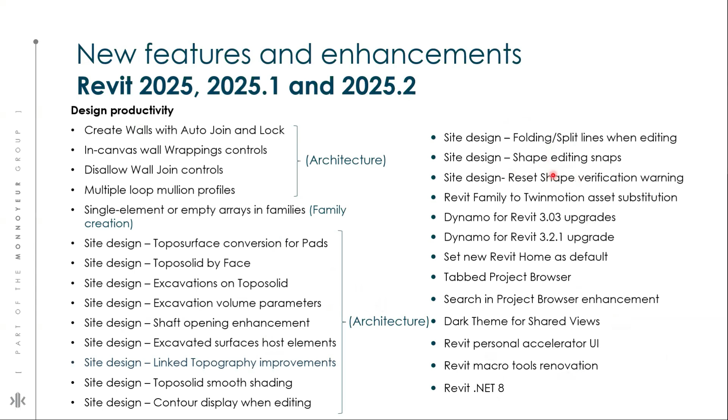So the core feature here is basically the list of core feature enhancements that have been updated through the 2025 to 2025.2 releases. You will see most of them are related to architecture, some are iterative improvements, some are in sustainability, some in structure, and a few in the MEP sectors. So we will explore each one of them one by one.

Okay, so let's just start with the design productivity. You will see we have some new features regarding architecture changes.

The next is create walls with auto join and lock. Previously we don't have this auto join and lock option. Now you can automatically join, or join and lock, a newly created architectural wall with the adjacent one. If you insert any element like a door or window, it will automatically create an opening for you, and you can still use wrapping around your inserted items. I will show you some demonstrations at the end of this session if we have time.

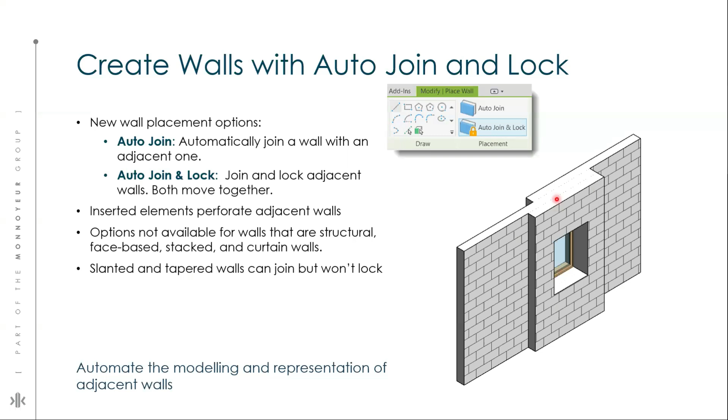So these options are not available for your structural walls, face-based, stacked, and curtain walls. But if you join two walls together like this and align and lock them together, you can simply move them together as well.

Another new option: in your Revit view, you will see these icons in your canvas which can control your wall wrapping. You can quickly control wall wrapping just by clicking on these icons. They are view specific, just like annotation stuff, and wrapping must be enabled in your wall type properties window for these icons to be available.

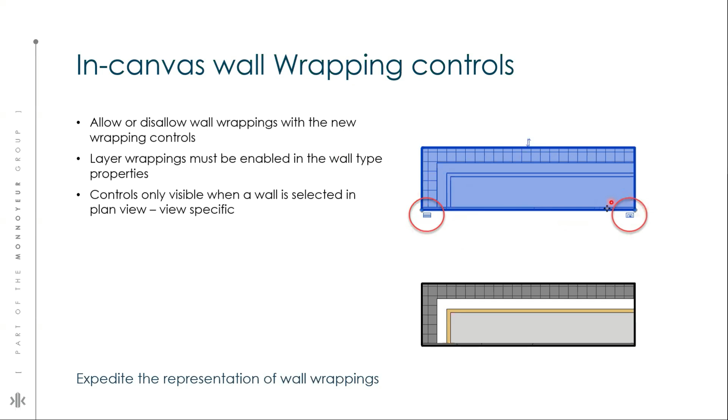Same goes for disallow wall join. This function was previously in the 2024 version as well, but now you can control it directly in your canvas. You can simply see this icon and click or unclick to allow or disallow your wall joints. It will work in your plan views and your 3D views as well.

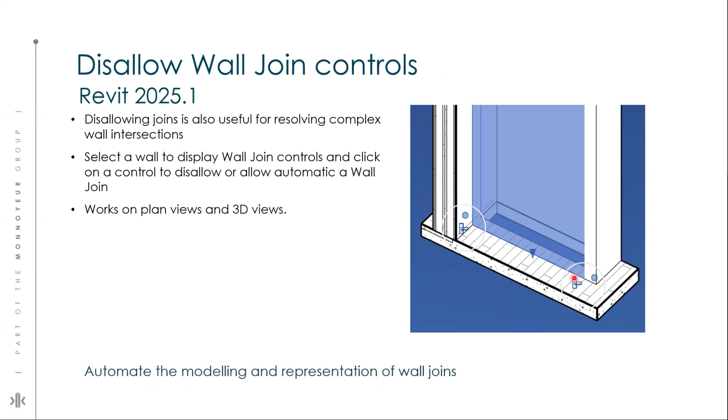Another great improvement is you can now create profiles for your mullions, and in your profile, you can use multiple loops. Just like if you work with families, you must have the idea of the loop - you can create multiple loops. This particular profile is created using multiple loops. You can see this is a single loop here, and another loop here. So you can now use multiple loops to create your mullions with profiles, giving you a higher level of development in your mullions as well.

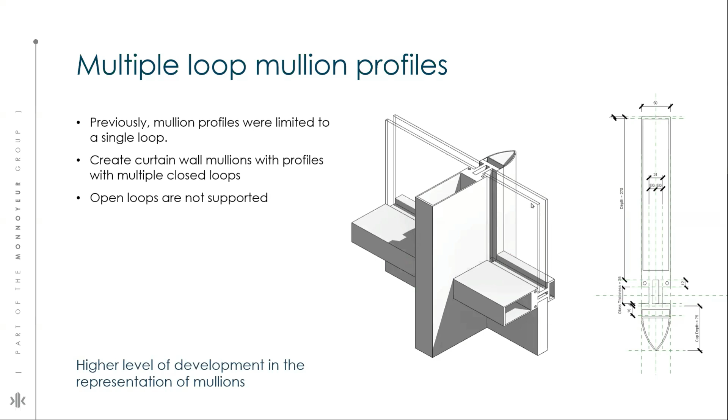If you do families stuff, in the previous version we had a limitation on the number of array counts - we couldn't go lower than 2. But right now you can create a family with an array count of 0 and 1 as well, and this is a pretty useful tool. If you want to create a seating arrangement for an auditorium or even for a dining table, you can create your single family and just define your array count. So in the 2025 version, your array can simply contain 0 or 1 element as well.

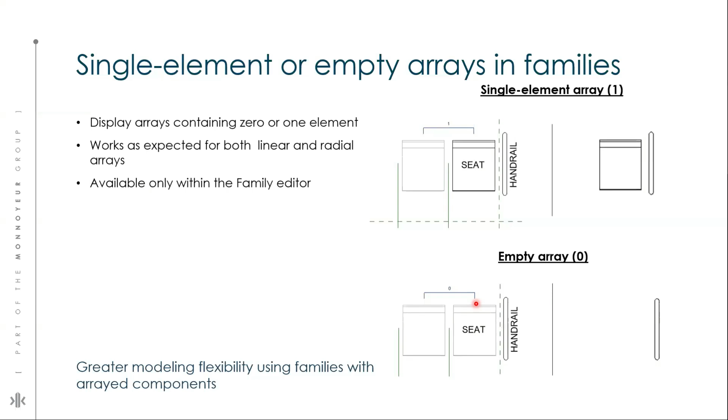There are also some major improvements in topo solids. If you remember, in the 2023 version we had building pads, and in the 2024 version they removed the building pads option. But if you're now importing your 2023 model into the 2025 version, you can still create your topo solids, and these building pads will convert into the excavated area. So the new option added to your topo solid in 2025 is the excavation area, where you can simply excavate the area from the topo solid.

Another great option is that previously you were not able to use massing to create your topo solid. Now you can use massing to create the topo solid, but you just need to make sure it's on any non-vertical faces. If you select your topo solid which is created from the mass, you'll always see this option in your properties palette ticked, showing that this topo solid is actually created from the masses. And if you're using masses, you can quickly create some complex shapes as well, and further use Dynamo and all of this stuff.

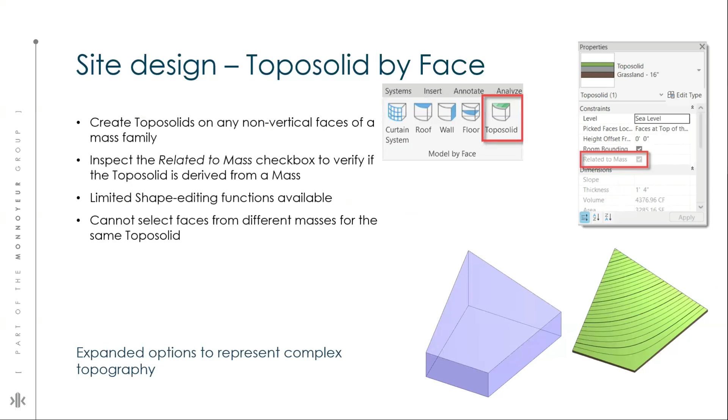So the new improvement in your TopoSolid is you can excavate your TopoSolid area by using a floor, roof, and another TopoSolid as well, which is really a good improvement. Previously you just needed to create an in-place family or in-place void to cut or excavate your TopoSolid area, and now you can immediately get back to the original shape by clicking on removing excavation. This way you don't lose your topo solid or data history, and you have more control over your topography cutouts.

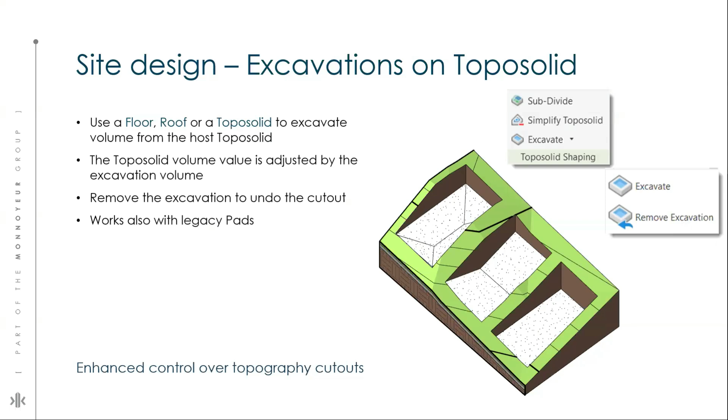With this excavation, you'll see some new parameters added. There are two parameters added for the topo solid: total excavation volume and individual excavation volume. Let's say you've created multiple excavations using the floor, wall, and other items - you'll see the excavation volumes here, like with the floor, with the basic wall and wall foundation for different types, and your total excavation volume as well. They can also appear on your schedule - you can use multi-category schedules to see the excavation volume, which makes it easier to coordinate with the site personnel, and it's a more efficient way to populate your excavation volume.

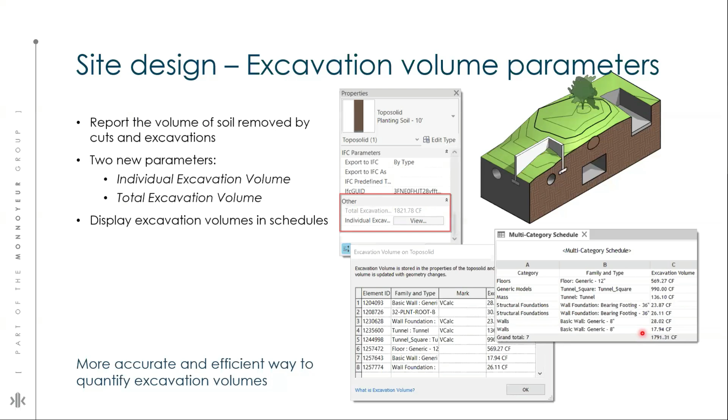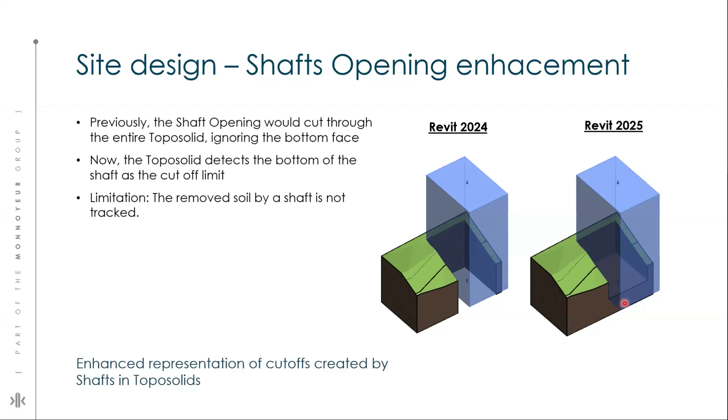Another great feature: previously if your shaft opening was touching your topo solid, it would cut through the whole depth of your topo solid. But now in 2025, it responds to the top and base constraint of your shaft. You can see in this picture the base constraint here, and the cutout in the topo solid - so it's now responding to the base constraint of your shaft cutout. This is a great enhancement in cutting out your topo solid as well.

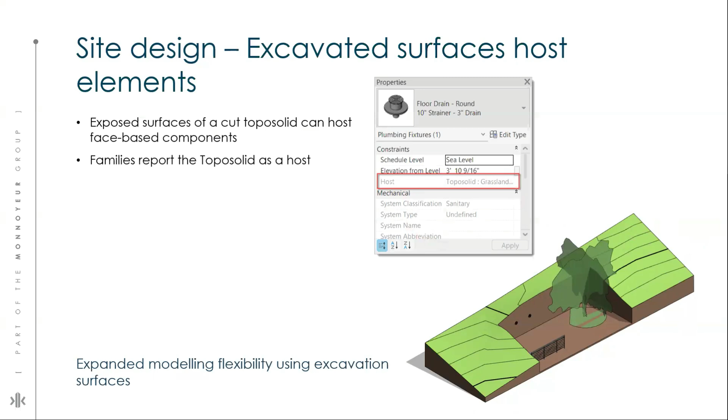This one is another great one. Previously, when you cut your toposolid or used anything like a shaft to cut your toposolid, you were not able to host anything on your cutout area. You were able to place railings over your toposolid, but not hosted elements. Now you can host your elements on these cutout areas, and you will notice that your host will be your whole toposolid. That's a pretty great enhancement in the 2025 version.

Next, if you have link topography, you will see that elements like site components, trees, parking lots, and even spot annotations placed on the link topo will be preserved after reloading the revised link. You don't need to do extra work if you reload or change anything in your link model. This is again a great improvement.

But if you are working with link topography, note that if you reload the link and the shape or face of your topo has changed and it does not include the original host surface, the elements won't be hosted at the original plane. So you need to take care of this as well.

This is for visuals, like you can see the triangulated areas here. If you have a lot of triangulated area, the new option is added under Massing and Site. You just need to click on this expanded panel, and you will see this topo solid smooth shading. This is the example of topo solid smooth shading—you can get rid of these triangulated sharp corners.

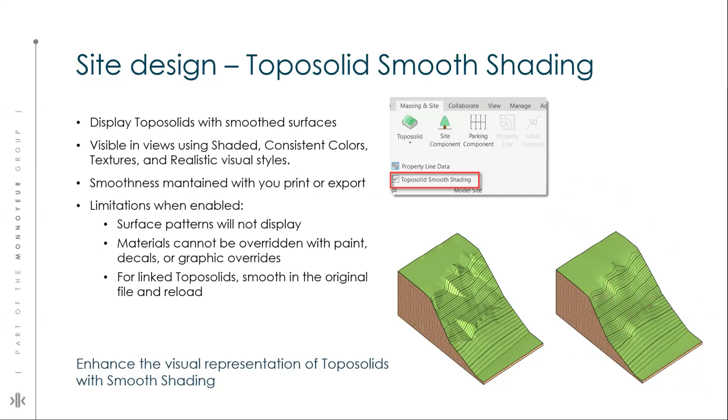Now, if you have used 2023 or 2022 versions for editing your topography, you will see that this is the most hectic process when placing the topo solid points. The improvement now is that when you are in editing mode, you will still be able to see your contour. This basically gives you improved control over editing your points, so you can still see the contour display while placing points on your topo solids.

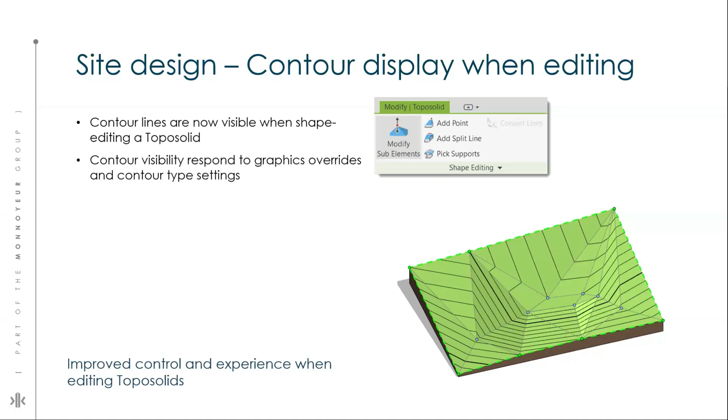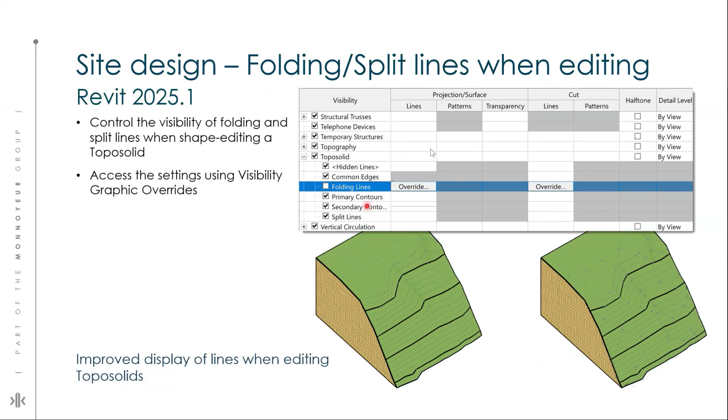Some more controls in the visibility graphics—if you go on topo solids here, you can see the folding lines, which are these triangulated ones. You can turn them on and turn them off during the editing process.

This is the most liked feature. They have given you the option to snap to the points in your topo solid. You can simply enable or disable the snapping to internal points and edges when you are in your shape editing mode, making it easier to pick up any particular point.

Let's say you have created a floor in your topo solid. When you are in editing mode, you can simply click on snap XYZ and you will be able to pick the points on your floor, or even on your roof or any other topo solid. This is a great feature, as it increases the accuracy of your points—if you have more points, obviously you have more accuracy. So this greatly increases the accuracy of creating your topo solid.

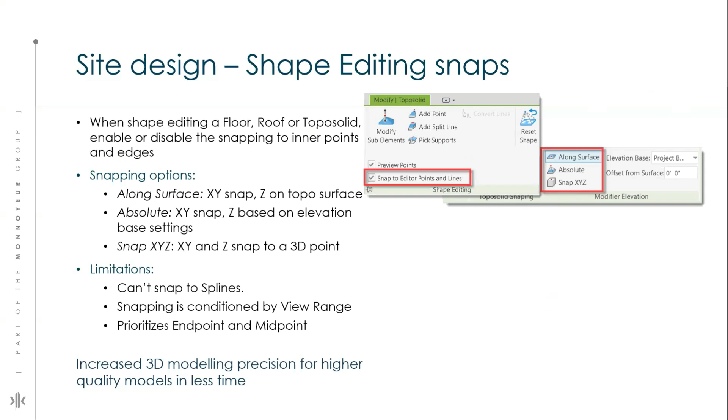And again, we have this option: if you have messed with your topo solid, you can always reset your shape and get back to your original shape of your topo solid. You have this reset shape button here, and you can simply go back.

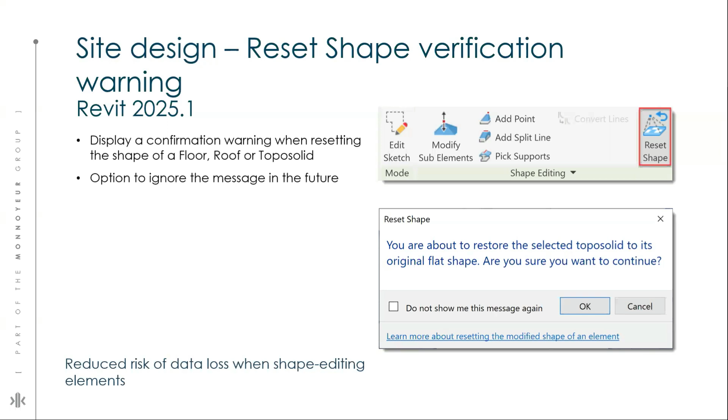Some improvements for Twinmotion—you are now able to link your low detail Revit families to high resolution Twinmotion assets. This lets you efficiently control the placement of elements within your Revit environment without sacrificing computing performance. You just need to go to this substitution setting, quickly set up your substitution directly, and map your Revit family with the Twinmotion object, and it won't use your computation power. This is a good feature for those interested in creating renderings.

And we have some upgrades in Dynamo as well—a few more nodes are added, like topo-solid nodes. You can simply create topo-solids by using the Dynamo nodes. Some more updated sample files are added as well, along with improved interactions with geometry. So it's nearly an improved version of Dynamo, letting you work better with the 3.03 upgrade of Revit 2025.

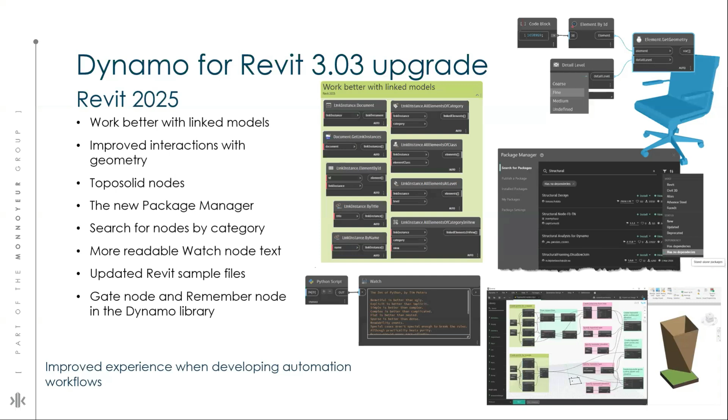And some UI updates as well. You will see new homepage, new workspace, workspace-based templates, some new nodes, and you can create panels on curved surfaces, and DefineData node for validating incoming data type. You can unpin and collapse preview bubbles, and you can update node icons and library, or simply customize the node icons and the library. So overall, UI improvement as well.

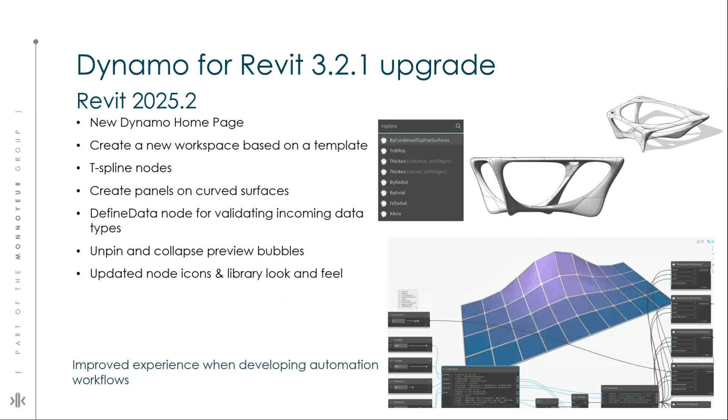You might have seen this before in the 2024 version, but in the 2025 version, this is basically the default view, and you can use it to search by name. You can search both the files and the folders in the same hub, and you can simply switch back to the legacy Revit home by toggling on or clicking here. You can switch back to the previous version's home as well, but in 2025, this is now the default UI of your home page.

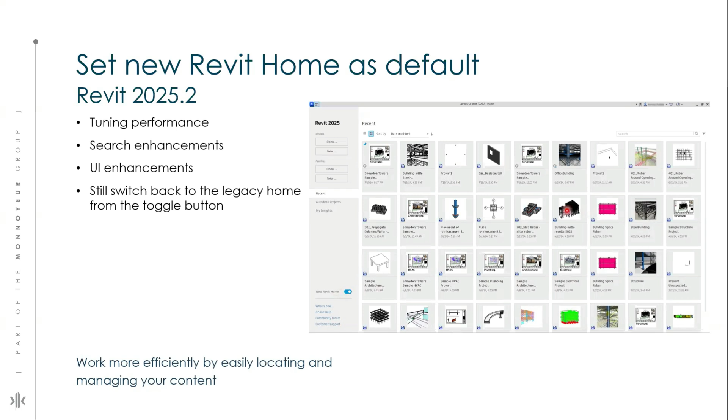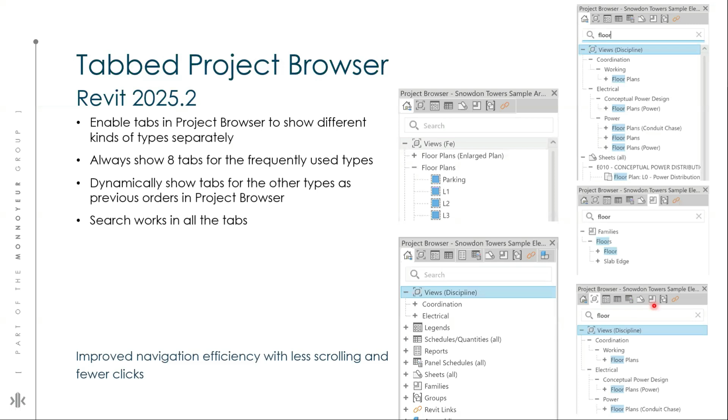Some improvement in your project browser, like this is useful if you have very large projects and a very large project browser. You will see some icons or tabs created separately for different things here, which is your views, legends, schedules, panel schedule, sheet families, group paneling. So you can quickly access different things in your project browser, and it basically minimizes your scrolling and number of clicks. So it improves your navigation with less scrolling and fewer clicks.

Again, search is improved in the 2025 version. When searching in the project browser, you can now view all the child nodes. So when the parent node, like this one, contains the keyword, the user could get a better search result than before. So when you cannot remember the accurate words in your child node, you can simply type the word and it will give you all of your child nodes under your parent node. You can see the difference here - there are 4 numbers here, and you can see 6 here, and 2 here. So again, the improvement means you can search more efficiently in the 2025 version.

For structure, those who work on the structure side, you will see the parametric splicing of the typical rebar. The new option is you can see the splice rebar here, and you have multiple rebars here. You can pick individual rebars as well, or you can simply splice them by length. You can define the minimum length and you can define the maximum length, and this way you can splice your rebars, basically enhancing your efficiency in accurately modeling your rebar systems.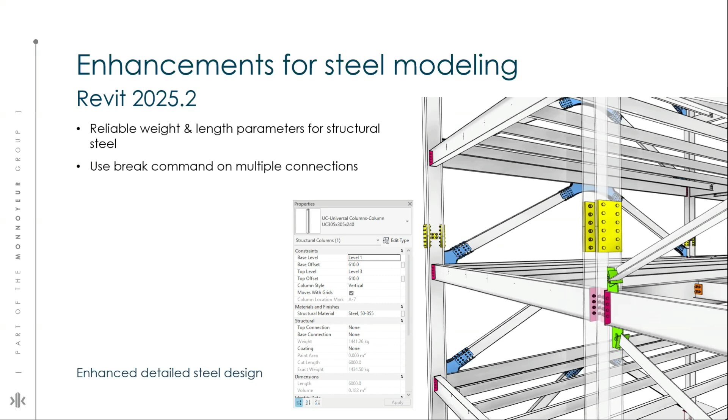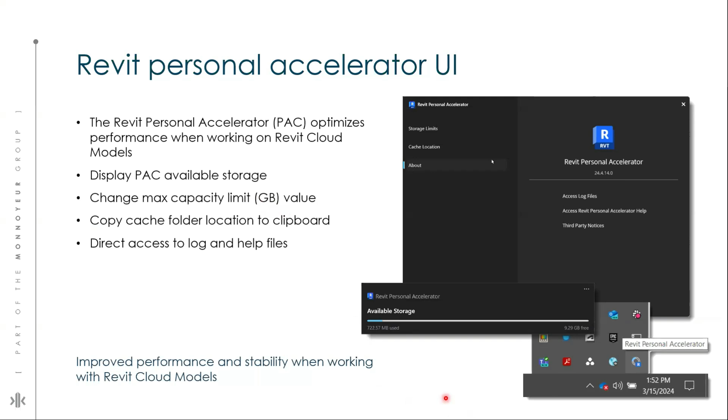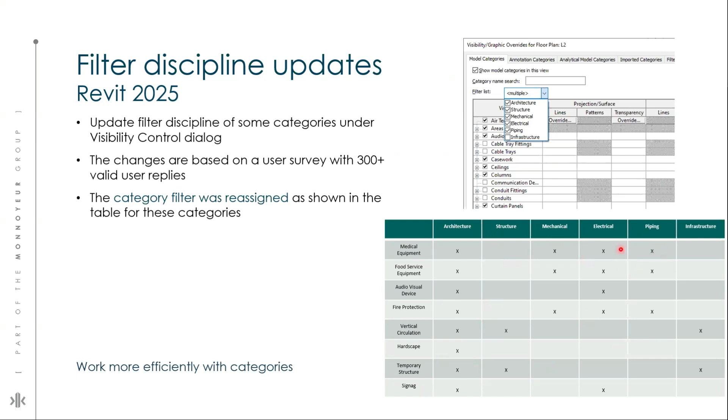Now for changes in visibility graphics - based on customer feedback, the discipline filter in the Visibility Graphics Override dialog has been updated, and you will see predefined list filters in visibility graphics. The modifications are shown in the table. For example, audio visual devices are now showing in both the architecture and electrical filters, and mechanical equipment as well. Same goes for medical equipment - you can see they are now showing in the architecture, mechanical, electrical, and piping discipline as well. So again, you can work more efficiently with this.

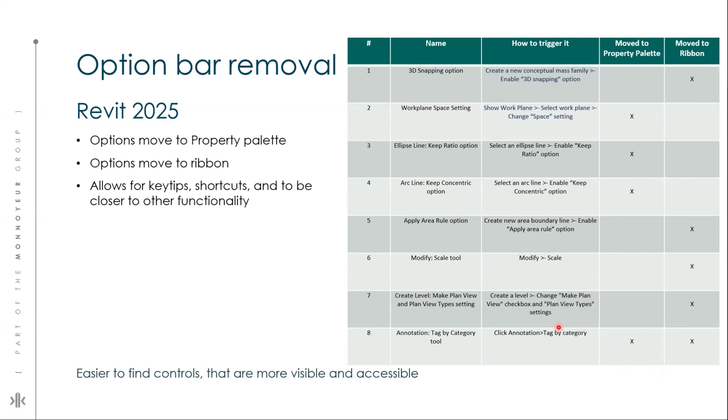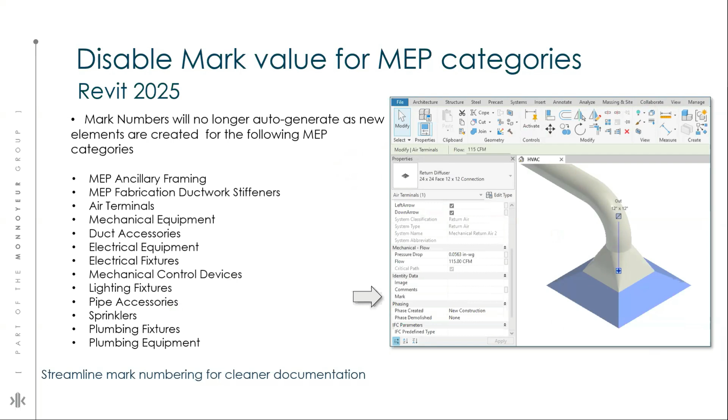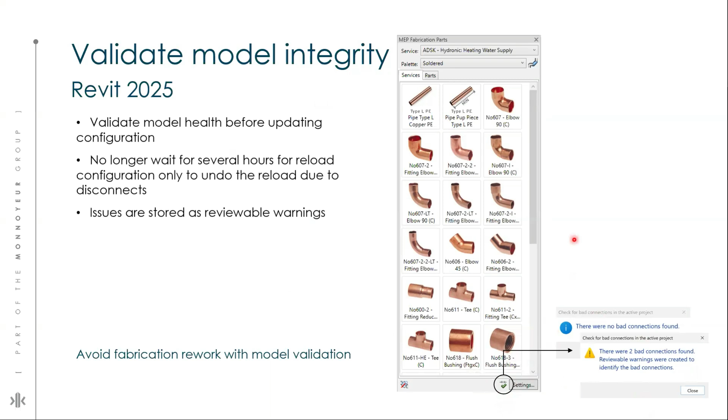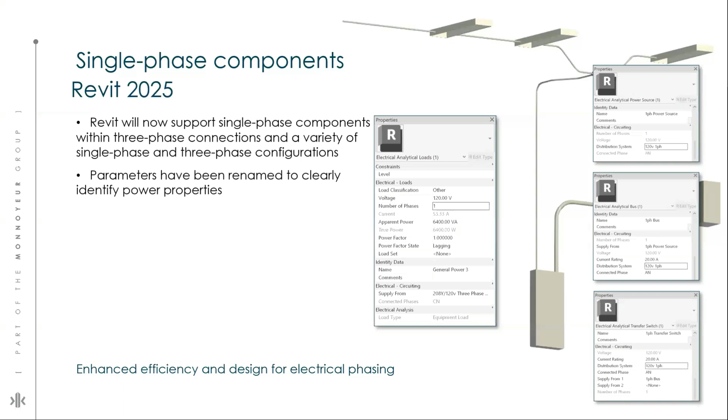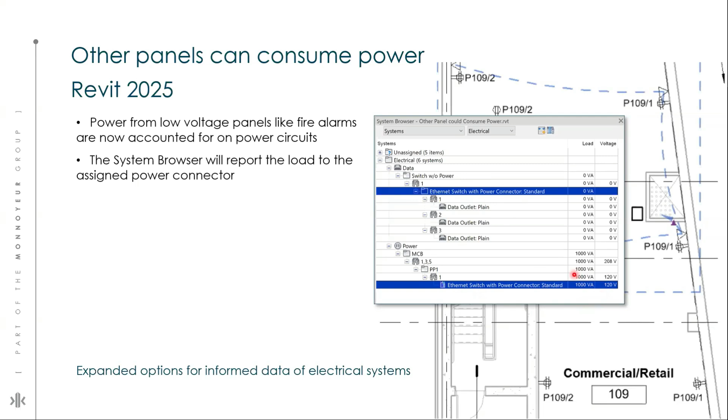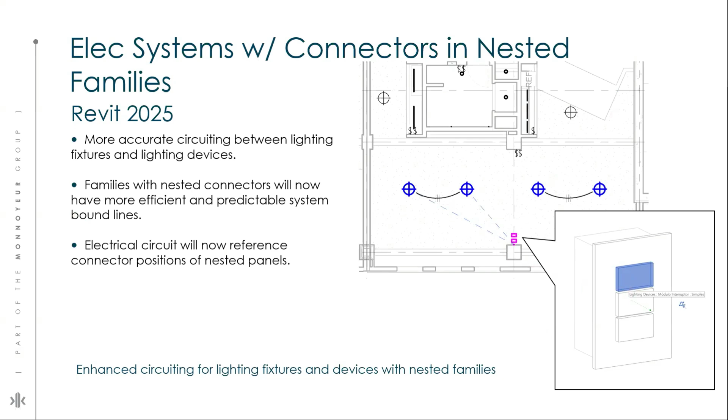You can add your fabrication data manager. You will now be able to add and remove types and edit data information in your parts editor, and even when you are editing your data, you can quickly see the preview of it. This makes your fabrication workflow a lot easier.

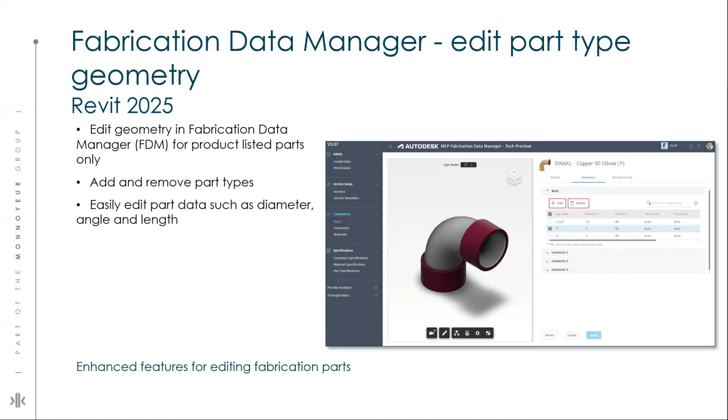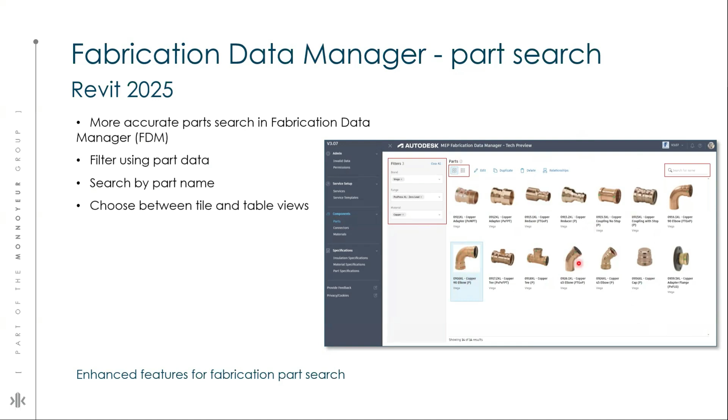Some enhanced searching capabilities - you can filter using the part data, search by part name, and redefine the thumbnail or preview of the UI of this window for a better experience.

With your fabrication data manager, you can simply assign images. You can generate images from your 3D model, or if you already have images, you can directly upload them here. You can upload PNG, JPEG, and JPG format images.

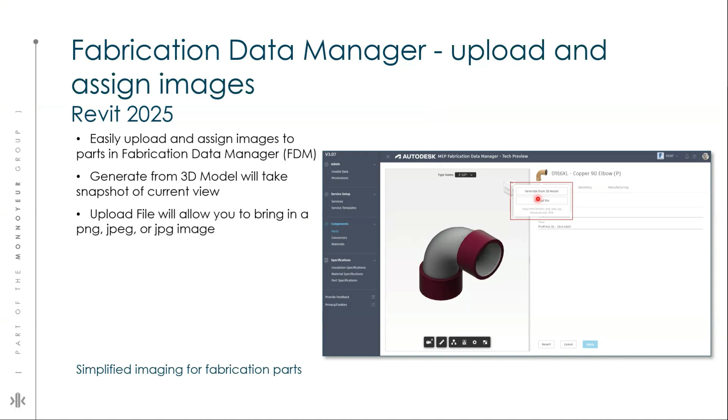The next step in the line is sustainability. You will see some more improvements in your GBXML and analysis tools. For those who have experience using this GBXML schema - GBXML is basically the XML schema from the green building standard, where you can simply transfer building energy data from different software to other software that supports GBXML. If you are doing load calculations, you can simply extract the data from your Revit model and export it to your load calculation software, and this will basically save you time from manually entering the room name and different engineering data.

Now it is more improved, and basically contains data for the zone equipment, air systems, water loops, hydronic loops, and some more HVAC systems, which includes air systems, heat exchangers, fans, chillers, and coil types. So now you are able to export more data with version 7.03.

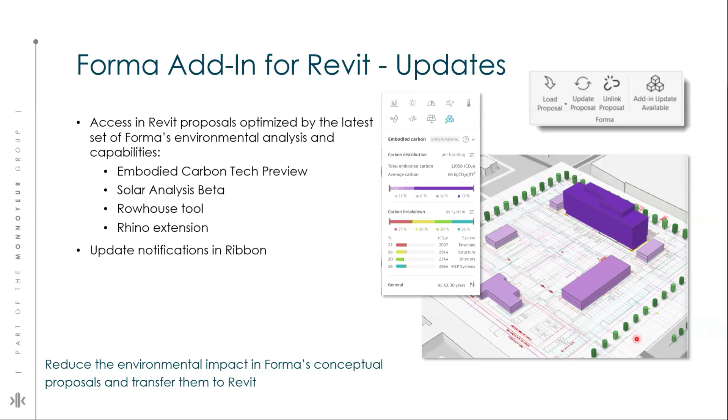For Insight, you will see it will be pre-installed in Revit 2025 version. So it will no longer be offered as a separate extension in future releases. You can use Insight or whatever you are building directly inside Revit, and you can send it for analysis on Insight as well.

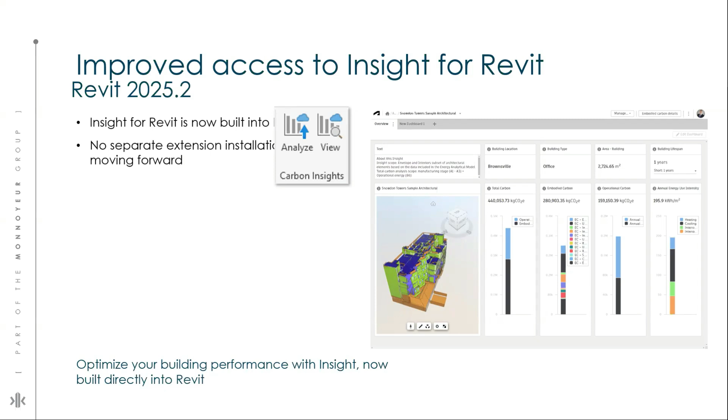We have this total carbon analysis for architects, and this next generation of Insight, or the introduction of carbon insight, helps you analyze the carbon impacts and more likely the trade-offs between the architectural system associated with a Revit model. Usually early phase design is recommended so you can quickly take more advantage of your insight.

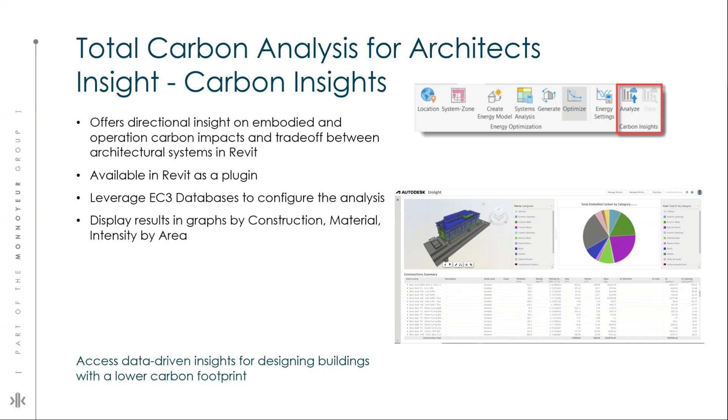Okay, so we will now talk about the analysis. You will see the major improvements in the structure ones and the major improvements in the MEP ones as well.

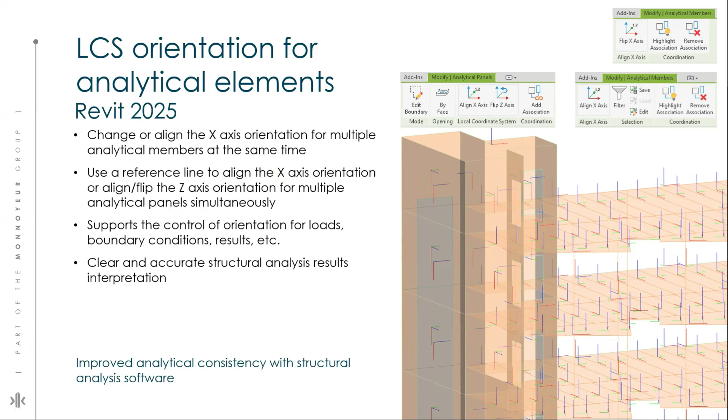In 2025, you can basically use the local coordinate system tool for these analytical members and panels to align axis orientation and direction. You can use a reference line again with some improvements in how you can simply align your members, and you can support the control of orientation for loads. Overall, it improves the analytical consistency with your structural analysis software, which is the Robot Structural package where you do the structure analysis.

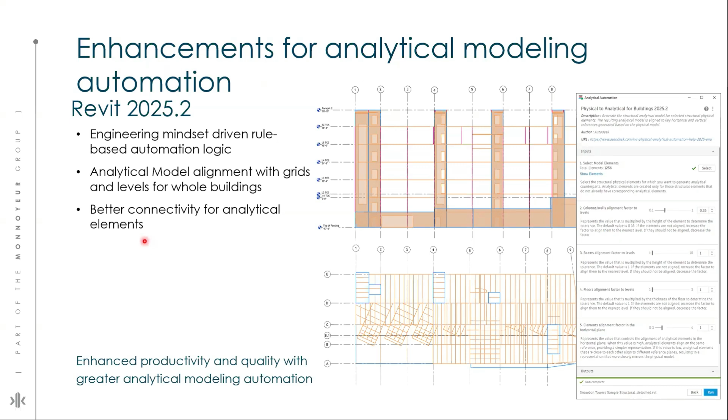You will see again some enhancement in analytical modeling. Those who have used this structure analysis or the analytical modeling tool will better relate to it. There's some more improvement with analytical automation and analytical model alignment with grids and levels for whole buildings, and you will see better connectivity for analytical elements as well.

Okay, so some interoperability improvements. Let's see.

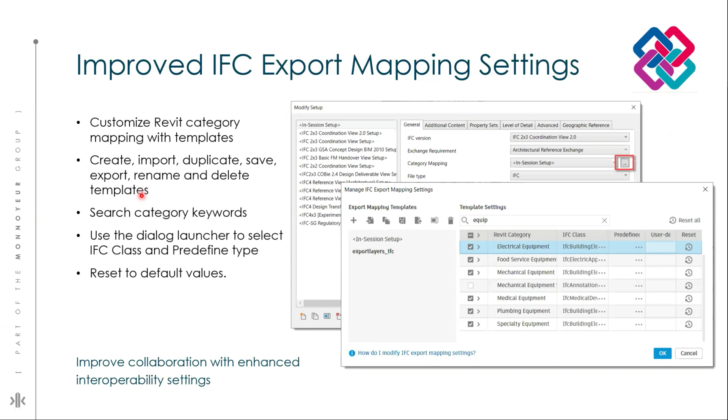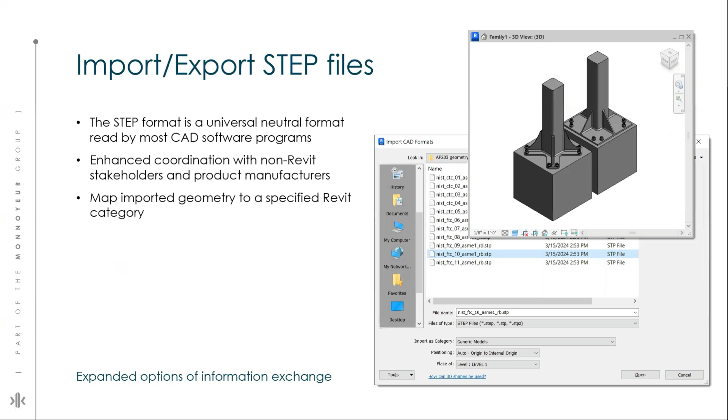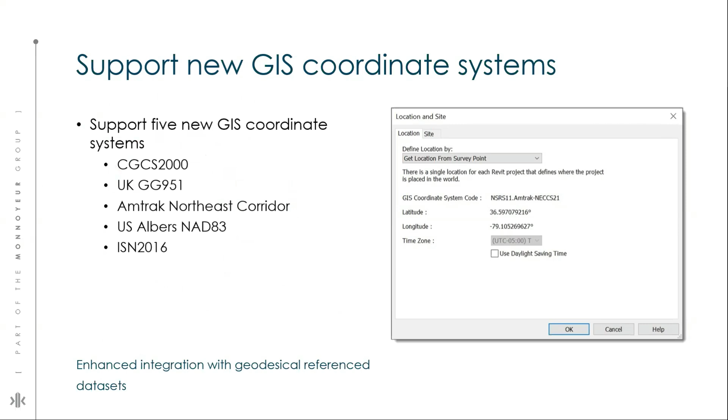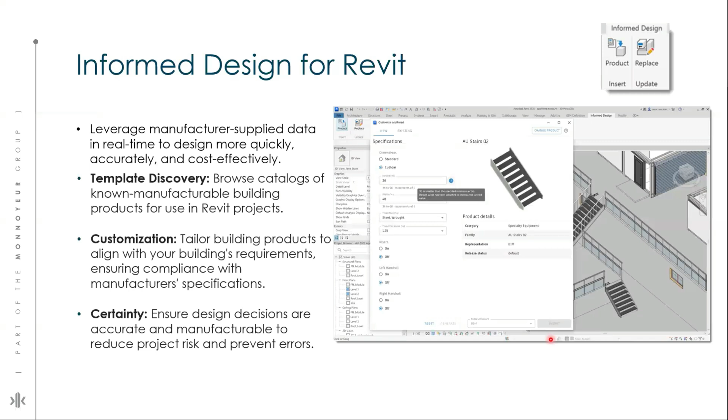Again, we have some new changes, update and replace, and I'm not going to spend more time on this.

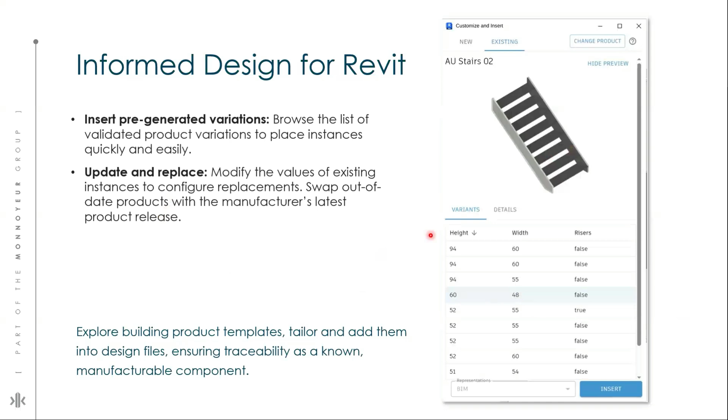For steel members, you can see this new detail steel design in Revit 2025. You can transfer and synchronize single part marks and assembly marks for your steel elements, and for structural steel connection components, from Advance Steel to Revit. This allows you to create GA drawings for your steel projects using Revit, giving you a better connected project across design, fabrication, and construction.

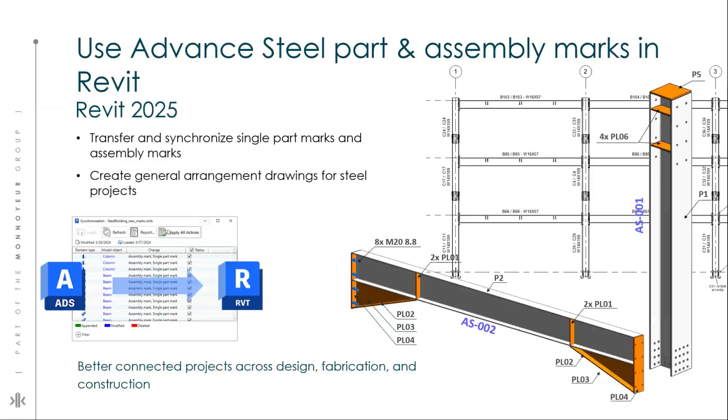Next, we will see some cloud improvements. You can easily see the monitoring and some changes in the monitoring of your coordination model, some UI changes, and you will see the display of the number of changes, added, modified, and deleted elements. They tried to make it more consistent, so you have a better collaboration experience.

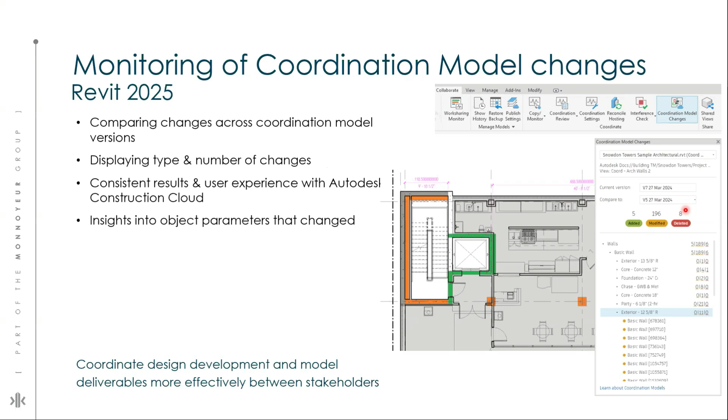Again, this is revised in the 2025.1 release, where IFC and the Navisworks file, the NWC file type, have been enabled for coordination model changes.

The NWC file exported from Revit will support reviewing coordination capabilities, as will files exported from AutoCAD. For IFC files exported from AutoCAD Architecture, MEP, or even Civil 3D 2018 and onwards, it supports ArchiCAD, Revit, MagiCAD, and Tekla Structures.

So the bottom line is it enhances linking of coordination models and better understanding of the objects that change in coordination models, highlighted and visualized in project views. You will have an enhanced linking experience with your coordination models.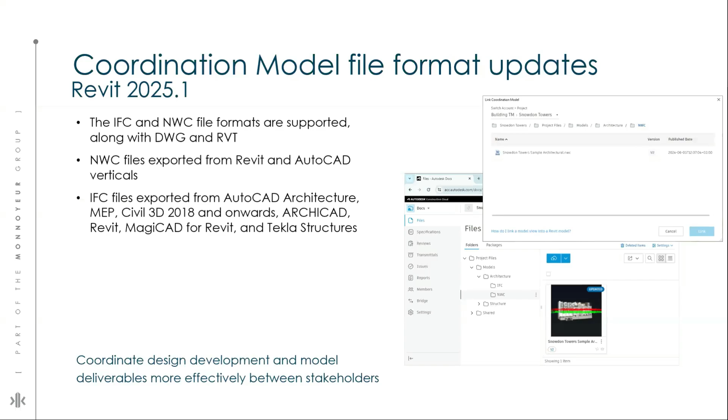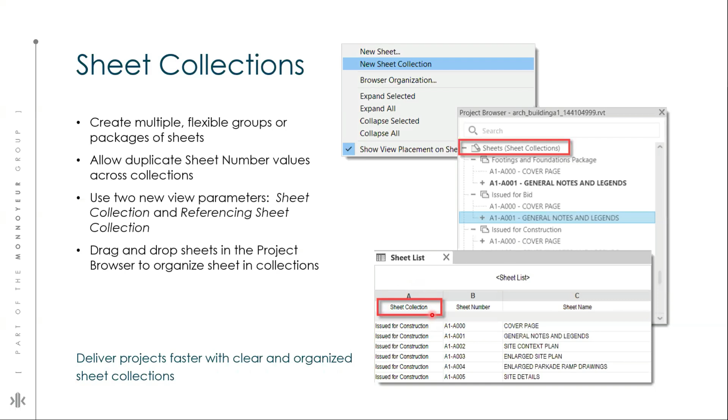Again, you can filter. In your sheet schedule, you will see this sheet collection parameter, and you can filter on the basis of it, giving you more control over organizing your sheets.

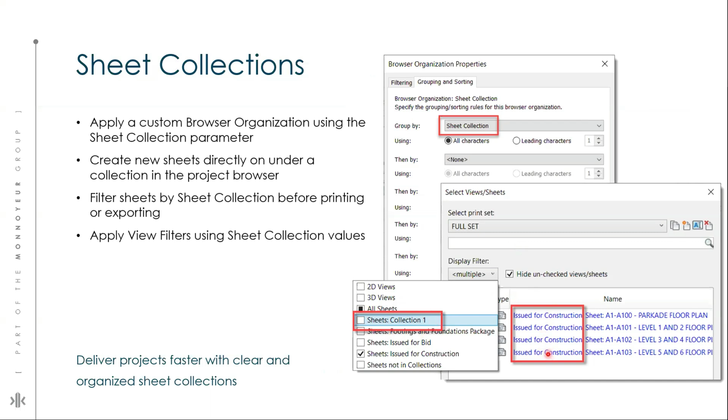Similarly, for your browser organization, if you want to organize your browser hierarchy for the sheets, you can use the sheet collections as well. And even for printing, you can use the sheet collection. If you want to print the sheets grouped under collection one, you can print them as well.

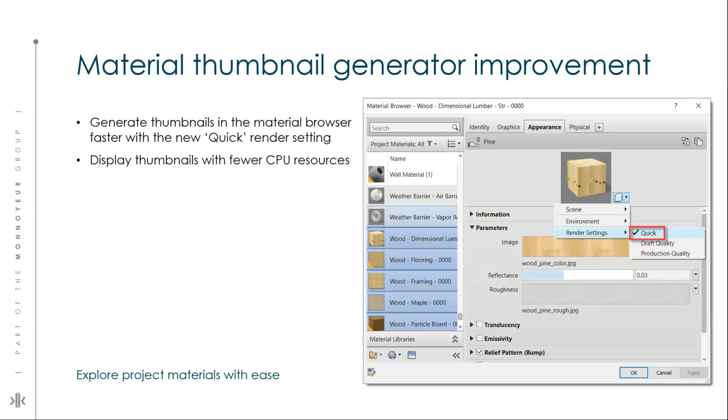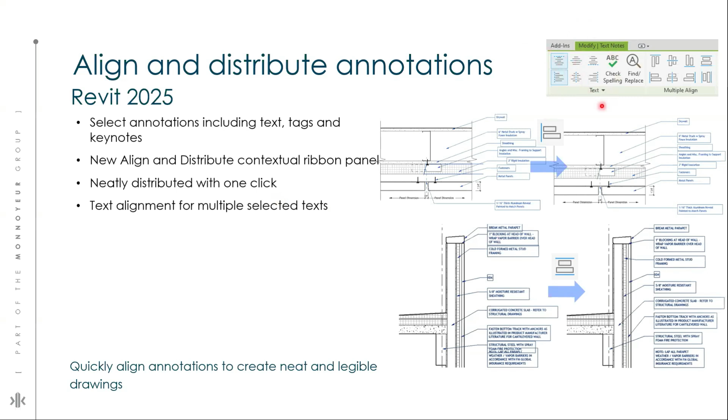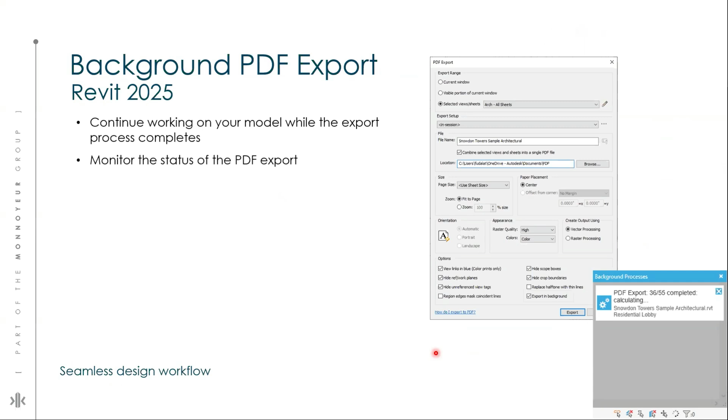This is again the good one. You don't have to wait for your PDF process to load. It can now be loaded in your background processes, so you can continue your working. You can monitor the status of your PDF export. So again, this is the good one. Some enhancement on your PDF export and print.

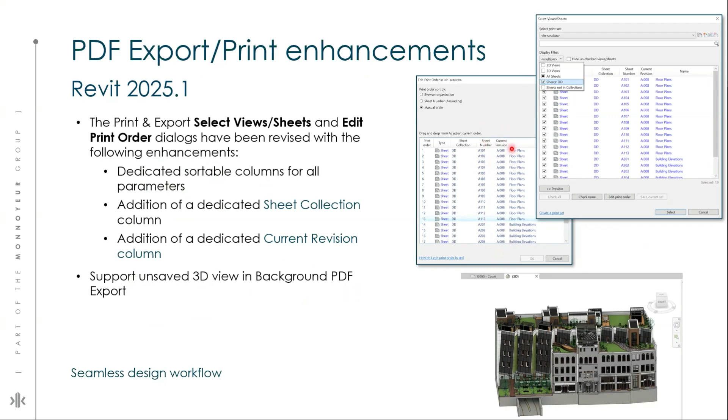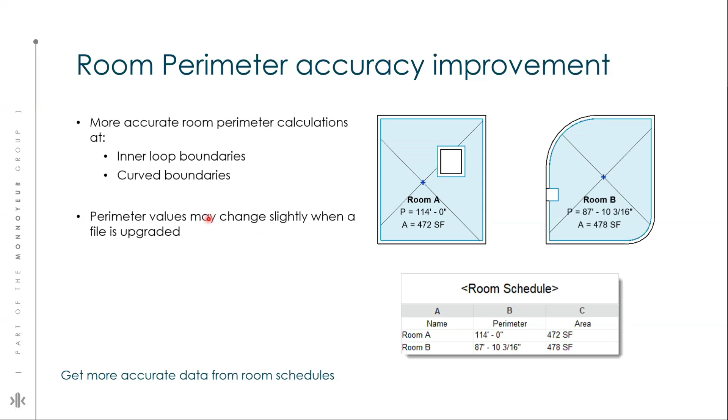They have made some slight changes to the calculations of room perimeters, so you will see some enhanced accuracy on these. If you are updating your previous model to the 2025 version, you will see some slight change in the values, and that's all because they have changed the calculation engine. So you will get more accurate data from your room schedules now.